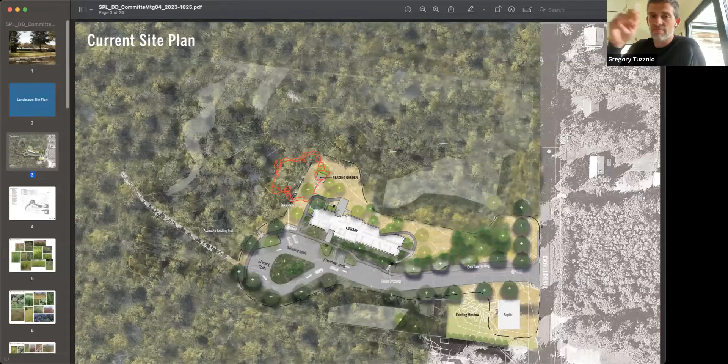It's an opportunity we could work on together, to kind of walk through the area, whatever area we define as being the general scope of the reading garden, and decide, much in the way you'd do with a volunteer group, to just walk out there and say, hey, what is speaking to us? What's looking cool? And then figure out how to literally connect the dots.

These various nodes I'm talking about could be a series of logs to sit on. It could be a flat clearing area where you have a couple Adirondack chairs, or a bench that's purchased. It could be something more communal, like a small council ring, or a gathering of stones that allows maybe 6 or 8 people to gather in an outdoor classroom-like arrangement. It could encompass any of those types of things, and it could grow over time.

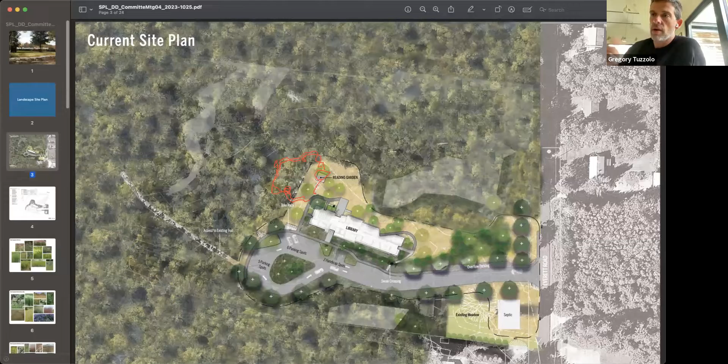It's really very flexible. But what I was imagining is that as part of the contract built by others, we would recommend that you consider the accessible portion of this reading garden feature be built by a professional contractor, if it does indeed need to be something more hard and defensibly accessible.

From a technical and legal perspective, we've found, for example, things that you can't—I don't know how aware folks are of this—but things like pavers that have joints that are too wide, or changes in elevation greater than 1/2 inch, are all restricted under accessibility code.

So the execution of an accessible path in a public building like this is something I typically would recommend to a client to have designed and built by professional contractors under the scope of a contract like what we're preparing.

And we can work to pare it down, minimize it, to make it right-sized as it needs to be. I think what you're seeing is probably bigger than it might need to be, but there's a bit of subjectivity there. So that's the concern for raising it now, and trying to advise you to consider how we might develop just that limited portion as part of this contract versus saddling you with that responsibility down the road.

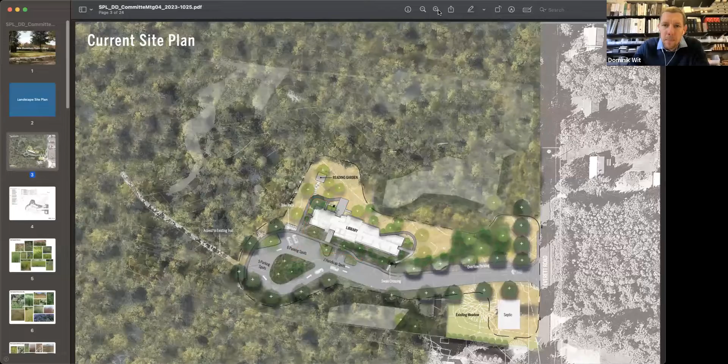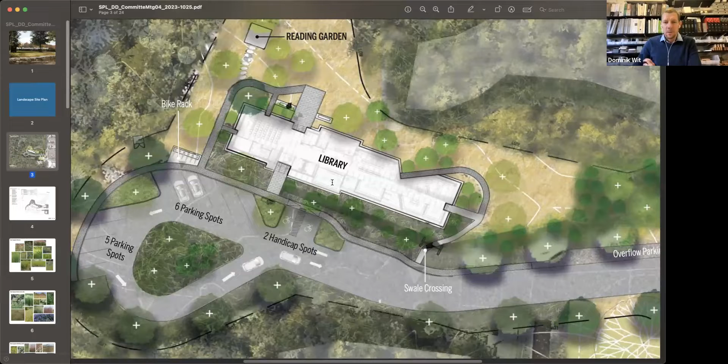Thanks. I believe that 20-foot line Greg was referring to was the volume, the bar volume of the building. So it's kind of that southern line. If you can see my cursor, I believe you can - yes, so it's this line and this line. So I thought you meant from this line, the handicap spot, to the building itself. What was that measurement? So it's only pinched at the teen room. The teen room is a pop out to the larger rectangular volume, and then it actually comes back in. The reason you're seeing this larger is you're actually seeing the roof overhang. So I believe at the teen room it would be slightly less, by 3 or 4 feet, so you'd be at 16 or 17 feet then to the curb. I see, okay, thank you.

Any other questions?

No questions, but thank you so much. May I ask Greg one more quick question?

As I look at this plan, it's hard to read, but are you proposing that the field grow in? It looks like it's shown as a wooded area now, or is that just an artifact of what you put down there? I think that is an artifact, but I guess what I would say regarding that question, I think we should address it quickly.

There is a tree line that exists currently, and Penny, as we discussed in the field, the zone, sort of an open zone, as part of our NOI process, we confront in some way the issue of maintaining that clear area almost exactly the way it is today. I think what we can revise is this rendering to make it look a little more matching with that, so it's not the intent that we're allowing that to grow in.

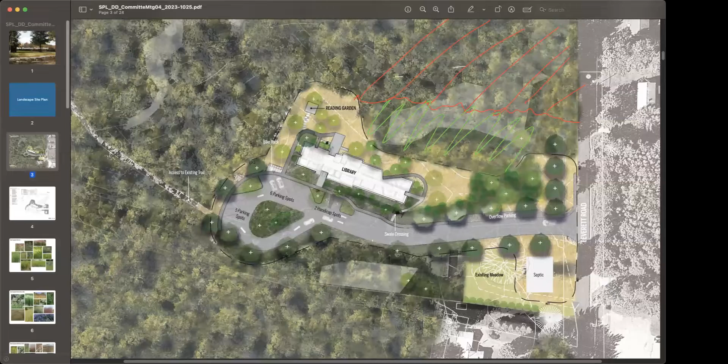Okay, thank you. I would say that the Conservation Commission likes that field, and although the issue of mowing has been troublesome over the last year, I think a plan can be worked out to mow it once a year, and I think they would like that. Any other questions for Greg?

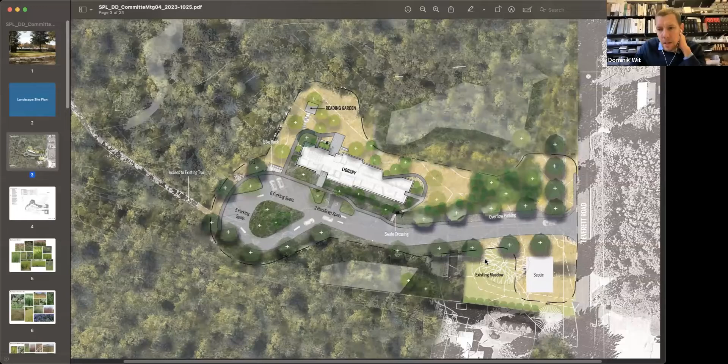I know you're on a tight schedule, so thank you. We have some other slides, Elaine, just to describe plantings. I can go to the next slide, Greg.

Yeah, there's a lot of detail here that folks can review at their convenience. But basically, we're working with Fuss and O'Neill, who understand pretty intimately the types of plants, sizes, species, et cetera, that the commission is typically looking for, and we're in alignment with that. The other piece we have yet to fully comprehend, as we're waiting on some field work, is a tree replacement program that might be imposed on us to account for the trees being taken for the project.

You're seeing a number of trees being proposed going in here, which is all good. But what I mean to say is we don't yet understand how that balances out against a required replacement program. I feel pretty confident about what we've got, but we may need to adjust this to satisfy that requirement, or define what that deficiency is and then ask for relief in the permitting process. In other words, if we look at what that delta is and say we can't afford it, or don't want to plant that much, then we simply ask for relief. But it needs to be accounted for prior to really understanding how those two things balance out.

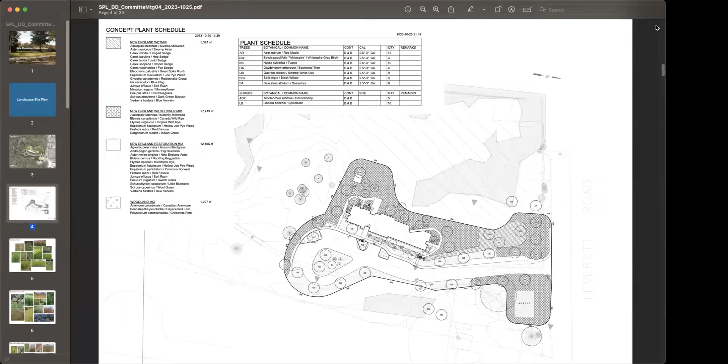Right. Yeah, it's a good point.

I think in terms of developing a sort of menu or roster of cards that we could play, that will be both meaningful to the commission and also that we can stomach from a budget perspective.

I think some of the other things discussed were attempting to get some kind of credit for work already taken place. There's a relationship to the current remediation work under the current NOI for the site cleanup. There's other activities regarding waste removal throughout the site that either have taken place or could continue further. And as Penny mentioned, there's no shortage of invasives to organize volunteer invasive removal activities that could be accounted for in some way.

And then I guess finally, perhaps supplementing this planting plan outside the limit of work to other areas of the site that might benefit from native replanting. That'd probably be the last one on my list due to cost implications. But if we just had a few things at the ready that the team understands as acceptable, palatable measures before we go into the hearings and start trading horses about that stuff.

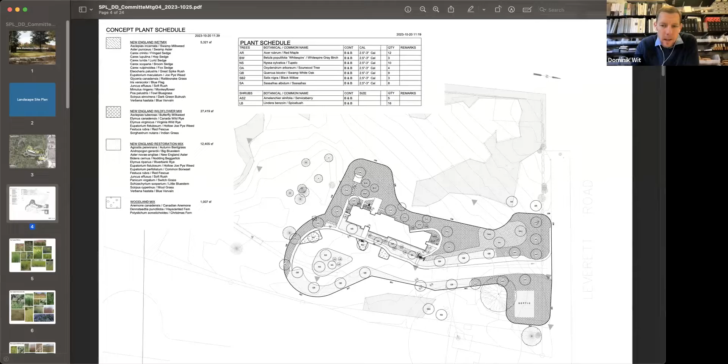The previous slide showed three seed mixes, so we don't have species identified per picture on this slide, but everything here is specified on the previous slide under New England wetland mix. This is an attempt to give you an overview of the palette of plants in this mix. Same with the next slide, a restoration mix, more used for graded or disturbed sites—various grasses, asters, Joe Pye weed, things of that nature. The intent is to replicate things you're quite familiar seeing on the side of the road and in various native parts of town.

Again, the wildflower mix, a third mix, probably a little higher cost, so we've reserved this for certain areas, and the restoration mix is more broadly implemented throughout the site. So really none of these, in my view, should be a surprise.

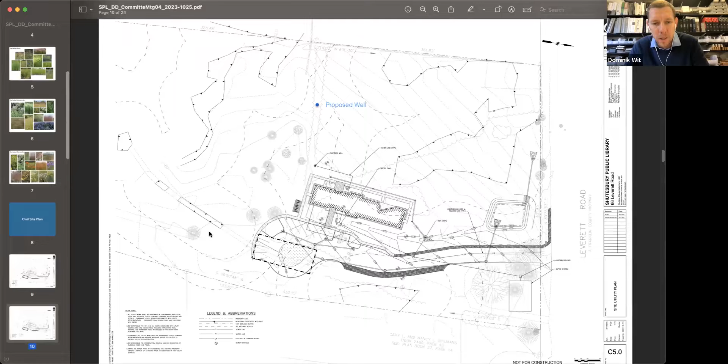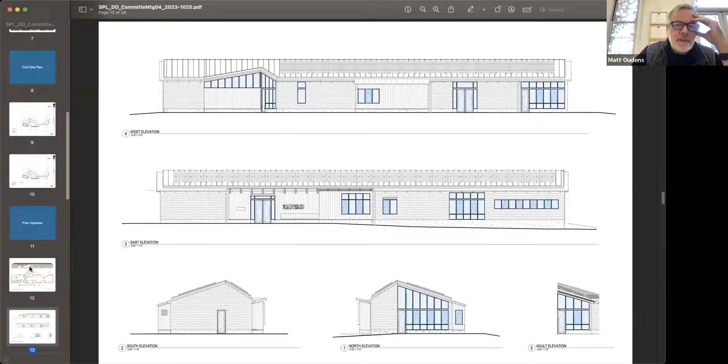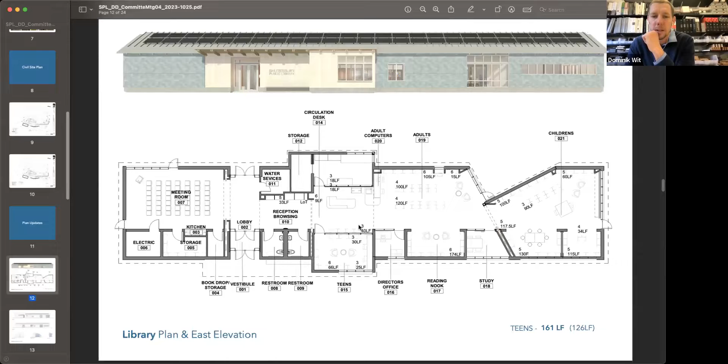Dominik, does the shelving outside of the teen room now go to the adult collection? Is that number you just had up there inclusive of that shelving or not? It is inclusive of it, and so we can now give it back to adult collections, Marianne. Sorry, I don't have that number here, but I think we were very close - we were just shy, and now that gets us over the threshold. Let me make that revision in how that's delineated. So this outdoor shelving that Matt's talking about will be assigned to the adults collection.

I wanted to get some exterior elevations to you as well, just to confirm where we are calling out operable windows. In all locations, we're calling out for there to be some operable awning windows.

Starting at the west top of the page, we have an operable window here for the staff workroom. This is the north facing window that I'm highlighting with my cursor at the bottom elevation. So you will have two operables for the staff workroom.

The meeting room will have a couple of operables as well. The east elevation, which is at entry, we have two operables for the teens, one for the director, two for the study, and then some for children's as well. That's a clerestory glaze condition here.

And then the children's north facing glass wall, we have three operables, and then we have two for the adults area as well.

Also to note, and we're still working on this, we need air intake and exhaust for the mechanical systems that are being housed in the plenum space for the building. So we're looking at incorporating how those grills are defined in the elevation.

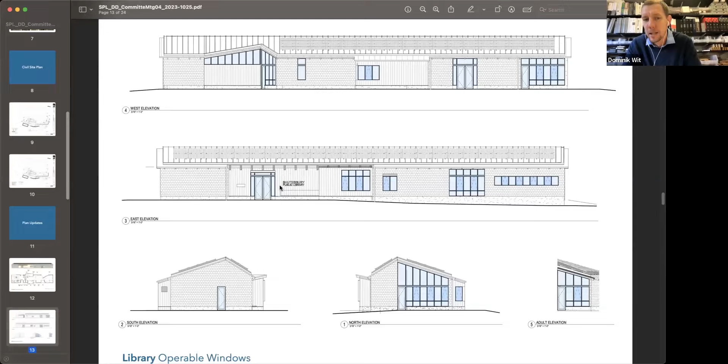Another element here that you are just picking up on is we're looking at a placeholder for a bench currently at the entry porch area. We have another view that actually you can kind of pick it up here in the elevation. So it would be an integrated wood bench, or this is what we're holding at the moment.

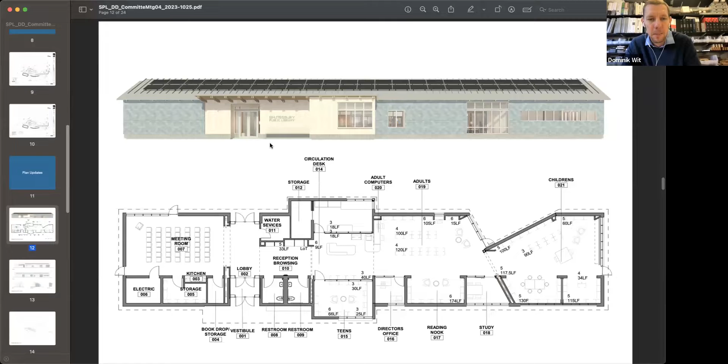So we'd like to get your input on that. This could be done in different ways. It could be more of a landscape element bench, but we feel like an integrated bench into the wood exterior might be a nice, clean way to handle that. I have another image of this that you can reference as well.

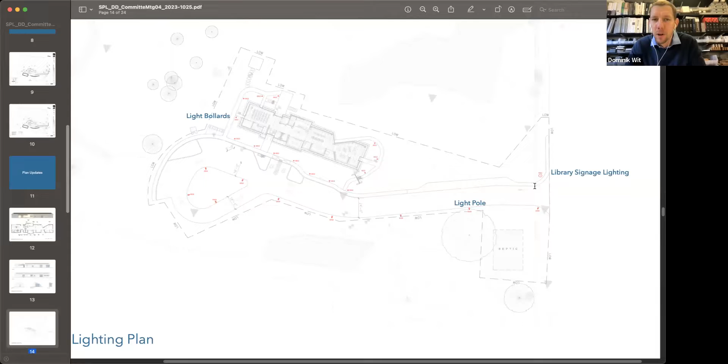Yes, hi, Dominik, could we move back to the prior screen with the east and south elevation? Yeah, see, you had a side, another, your show, yeah. So my question is, you know, I was not a fan of the prior roof design over the front entrance.

And I would like to know, I see two representations here on the north and the south of, I think, the same roof. On the south, it's sort of shown as going straight across. And on the north, it's shown with the reverse pitch. So I still have all the same questions about that roof, how it's going to be finished. Is it going to be reverse pitch? Is it going to be a flat pitch? All of that stuff. Whether or not you want to address that now or answer later.

For you today, Dale. Pardon me? We have some slides to address it in a couple minutes. Okay, great. Thank you. Yep, no problem. Marianne?

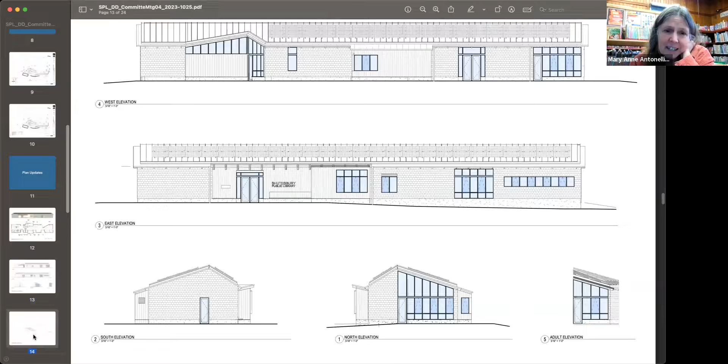Okay, so now can we go back to the lighting?

Dominic, you said that the light bollards around the ADA accessible pathways around the building are required by code. Are the light pole, this light pole up at the front?

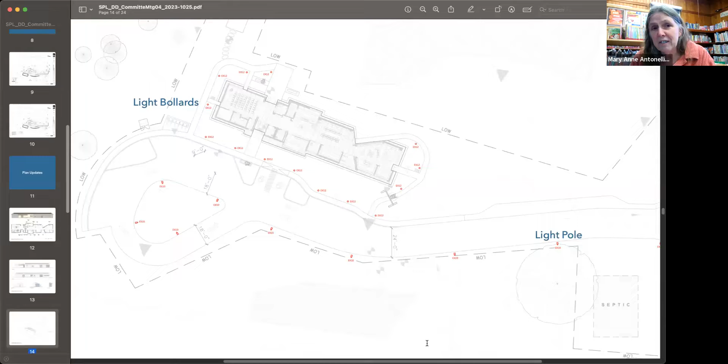So I'm thinking that this is a library in the middle of the country, and we want minimal lighting at night. So if there's a program happening at night or if it's open at night, then the building will have its lights on. And if it's closed, I don't necessarily want people to see it in the dark, same as people don't see my house when they drive by and it's dark. So how do other people feel about that?

Well, before people answer, we do have an obligation to provide the minimum amount of code lighting. We totally agree with you that we do not want this thing to be overlit. Dominic and I were just talking earlier about the pole lighting, whether we're obligated by code to put pole lights on the driveway. We're waiting on an answer for that. We know that we need the bollards at a minimum. The pole lights are typically more for wayfinding and safety, less code related from what I recall, but we are looking into that.

But we agree with you that we want this to be as minimally lit as possible. At the same time, we don't want it to feel unsafe. It's a public building, it gets dark early in the winters, people walk to their cars. I know it's unlikely that anything is going to happen in Shutesbury, but I think having some minimal amount of light around the building is not an unreasonable goal. I agree, we want to balance what we've got with the fact that it's in the middle of the country. We don't want it to feel like a spaceship landed.

Is it ridiculous to think of these as being motion sensitive, so they wouldn't be on all the time? Or a time clock, if that's feasible. I think in terms of security and the ability for the police department to come here after hours, early morning or whatnot, we need some more definitive answers on that. But I think there are opportunities to control this if it's required by code - can it be controlled more to the opening hours, or staff being there, things like that. So I'll get an answer to you, Elaine, on that.

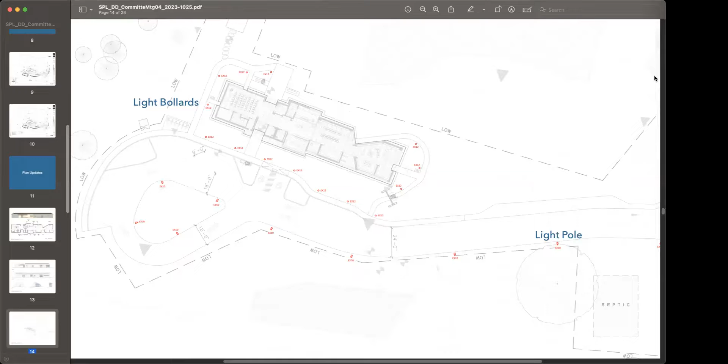Penny: silly question, what is a light bollard? A light bollard is basically a light source that's mounted on a pole, but a short version, 3 feet tall, something like that. Bollard really describes the post condition - you have security bollards located around certain equipment to protect the building from a car accidentally reversing into it. A light bollard is the same kind of thing but with a light in it.

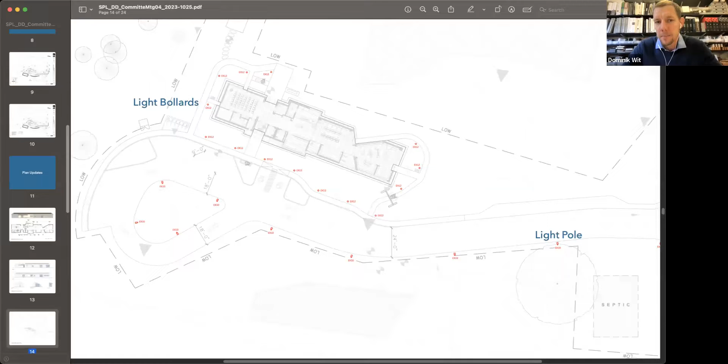I was talking to Stimson about what these could be. We're looking at a very minimal design, as small as we can handle, something with minimal diameter. We've also used flush lights before, but I worry that for code they wouldn't qualify because there's the potential they can get covered with snow. It's the kind of light that almost looks like a floor outlet - it's got a slightly raised profile but you can walk across it, with a very narrow opening that emits light that literally just grazes across the surface. We've used them before on the exterior, but in covered locations where it was less of an issue that they might get covered over.

But to Dominic's point, we do want to pick something that is visually minimal, so they'll be low height, relatively low output. All of the fixtures we're looking at, whether bollards or pole lights for parking, are going to be full cutoff fixtures, so the light is only directed down to the ground. You're not throwing light everywhere - we don't want any light going up.

And that helps a lot in terms of the kind of relative light in an otherwise very dark setting. So we'll have, in all these places, full cutoff fixtures.

So each one of these red dots that I'm seeing, those would either be bollards or poles. That's correct. And the ones that are on the parking, along the side of the building, yes. All of these would be bollards. Yep, all of those are bollards.

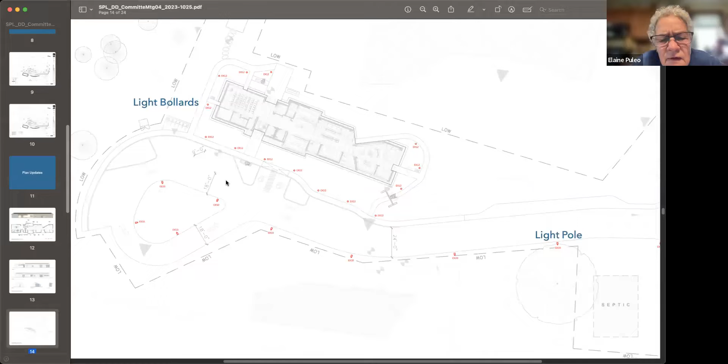Okay, so it's a little difficult to see. These I've called out as EX12s. I see. And then the EX10s are these. And then there's the one which is undefined, EX11.

It's really just to get electrical out here so that we could at least, if there's an appetite for that, illuminate an entry sign in some way. And that could be as simple as halo lit letters. If you guys know what halo lit is, it's when you have a three-dimensional standoff letter, and behind that 3D letter, there's a light source. So the light kind of bounces off the background that the letter is mounted to, and it silhouettes the letters. It's a very indirect way of lighting something.

It's that you're not shining light at a sign, you're not putting a floodlight onto a sign. It's a much more understated way of lighting something.

So here's another probably silly question, but that one with the library signage, it seems like you're going to be pulling electricity all the way out to that side, whereas could that be a solar light? It could be, and then it wouldn't have to have any electrical wiring to it. That's a good point.

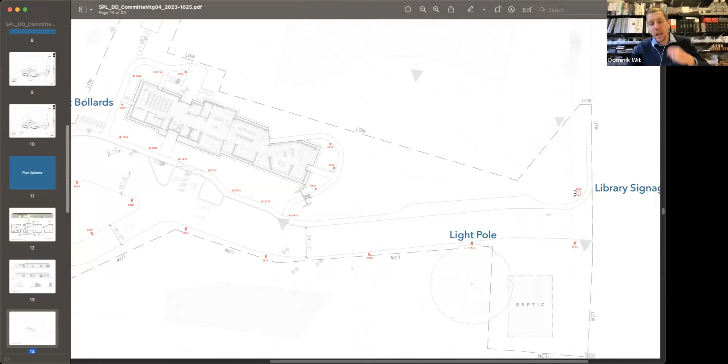We will be running power all the way to this pole, if required. So we would have to trench a little further to get power out to that light source. But yes, it could be solar - in the case of winter and snow, or maybe leaf debris, you may find that it does not perform as well. That's not necessarily a big issue.

Right, I have them around my house, and it doesn't really matter. They even actually shine through the snow. Right.

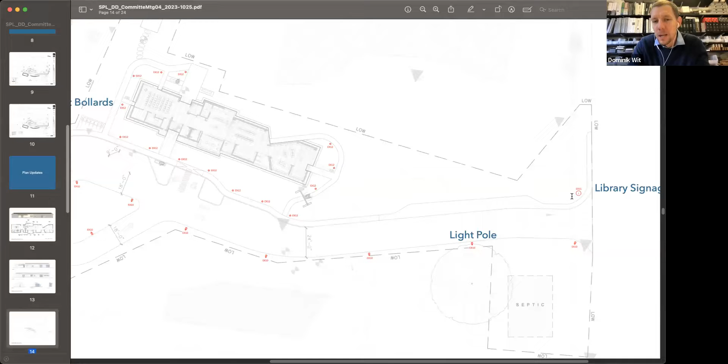So this is really kind of a placeholder to something that we think definitely enhances the entry experience, but again it's your call on that for sure. We don't really need lighting there - it's not a code requirement for the sign.

You may get borrowed light from this. This is really an effort to capture scope for DD pricing. We may find that before we issue the set, we're able to tweak this layout a little bit to maybe reduce a couple of fixtures.

We'll get an answer about the requirements as it relates to code for the driveway and parking. We know that we need them around the building - we have building mounted lights at every exit door. That's a requirement of code. In addition to that, you're supposed to light the accessible pathway around the building.

The spacing here is based on some photometrics from another project. We've got to do a little more work to confirm that this spacing is the right spacing. We may find that we can space them a little further and maybe reduce. How wide is that donut?

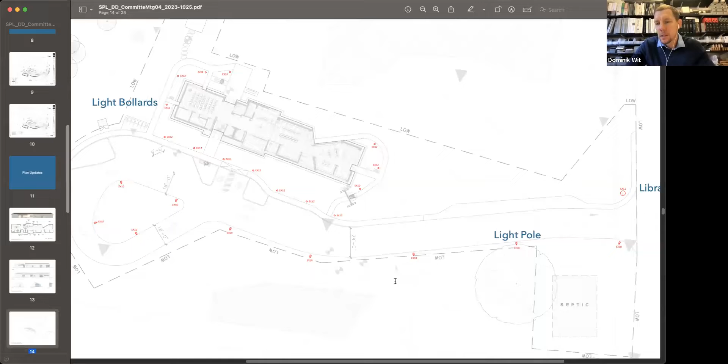Make sure that we're capturing enough scope and pricing. So here I've got about a 10-foot radius around each bollard, and then I think it's 75 feet around these street lights. So they kind of overlap the radius of illuminance.

I was wondering about the donut though, in the middle of the donut. How wide is that? Well, that looks to me like it depends - it's like 40 plus feet across here, 50 maybe.

And that, by the way, that landscaped area there is also doing some work for us in terms of stormwater. That would be planted - that's kind of a bioretention area.

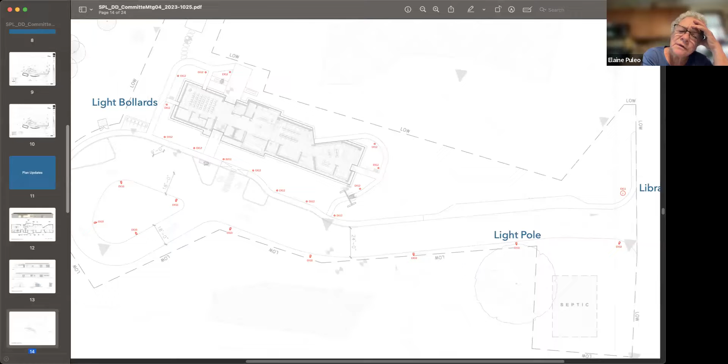Yeah, I'd have to go and look at the school at night and see what their lighting situation is, just to see how much light we really want to have, or that we need to have.

I think we are definitely on border line with code minimum, and we are not looking to add any more than we need, so we will definitely go that avenue.

Yeah, there's, from what I remember, pole lighting at the school. Just remembering the last time we were there for the community meeting, it's pretty minimal though.

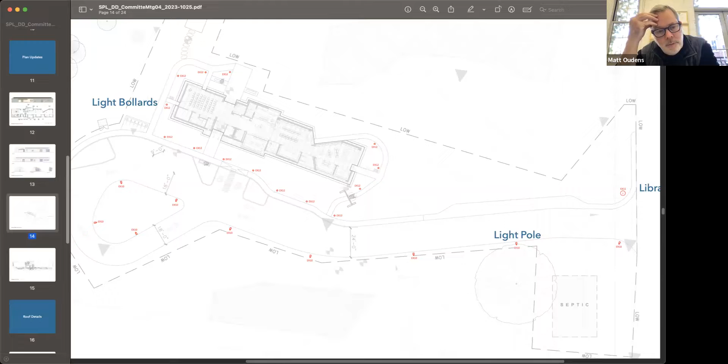Right, and I think as we've said, we don't want to overlight this, so we'll confirm those requirements and reduce this as much as we can.

So the next plan, obviously in the background since we met last, there's been a lot of coordination as our consultants have been tightening up all their drawings. I just wanted to quickly bring your attention to the mechanical and HVAC drawing.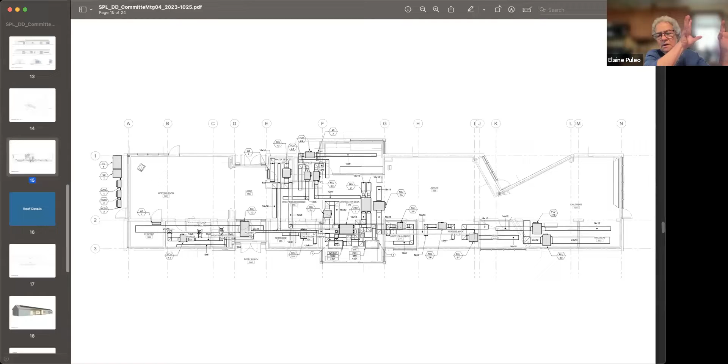So you will just be having a ladder that we would open the ceiling panel and go in there? That's right, and you would just stand on the ladder - you wouldn't even need to be fully up in the plenum space. They're going to be kind of low, so the person performing the maintenance, when you see them do that, you'd probably see the lower portion of their body still on the ladder, visible in the room, with their head up in the plenum space, taking filters out and replacing that way.

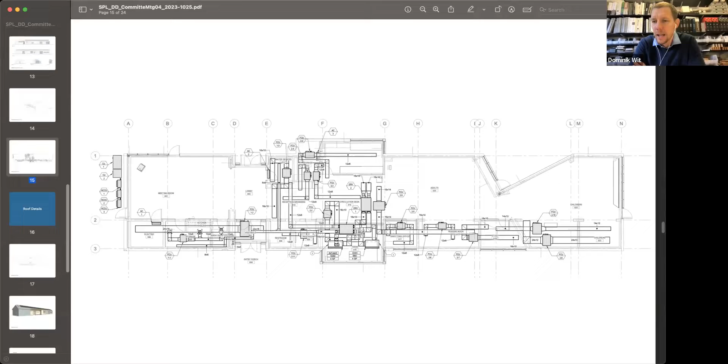What happens in 20 years when the equipment needs to be replaced? How do you access it then? Then those ACT ceilings, which are installed on a grid system, can be removed incrementally, I believe, Matt. So you can take portions of that out - it's definitely installed in a modular way. Thanks.

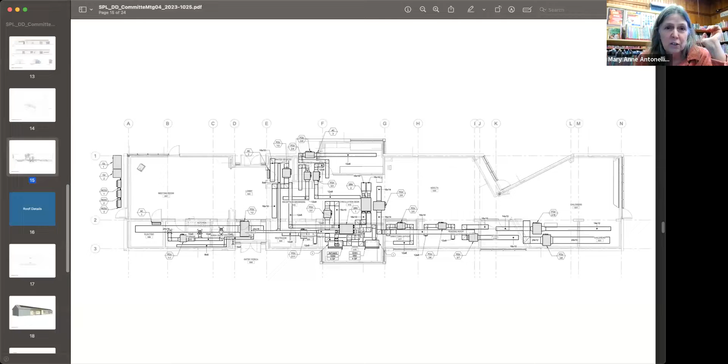Mary Anne, are you going to be up there on that ladder? No, I'm not, but we have a heater in the ceiling and Chris changes the filters. Chris is my husband, for those who don't know. We had to have the heater replaced, and the heater replacement guys came and took out the old one and put in a new one. So I've seen this all live and in person, and it's not nearly as daunting as it sounds. Okay, thank you for that. As long as we keep you and your husband.

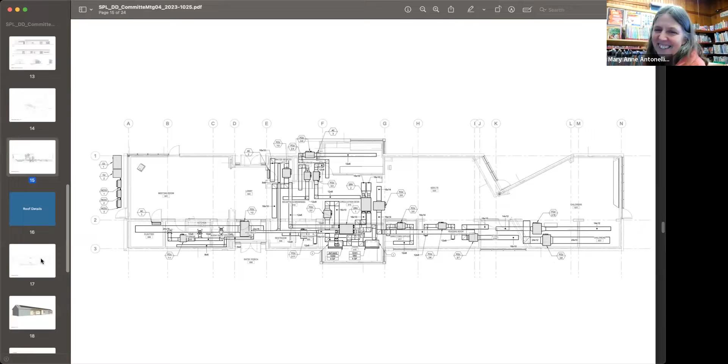So moving on to roof details here, I have a roof plan which shows you the location of the photovoltaic arrays, and also the portion of roof here at entry. What I wanted to show you is that to work with the rainfall and snow, and to be able to have runoff to either side of the edges, we're going to incorporate a cricket here, which is a kind of lifted condition that allows the water and snow to drain off to either side.

It's basically a drainage path that you create on this portion of the roof. I've indicated 2 downspouts on either side that would collect rainfall. General strategy for most of the roof is to allow water to sheet off the roof and be caught in kind of a catchment trough that we're going to have around the building. It'll be like a gravel perimeter.

We will introduce a gutter at this location, because we have 2 exit doors, one for the meeting room and one for the lobby. And then we have an exit door at the adults room, whereby we're going to incorporate a metal rain diverter. It's a small metal lip that takes on this angle and captures the rainwater caught in this zone and directs it left and right. Again, we'll have a gravel drip strip around the perimeter that will catch that. So there's a few entry and exit locations in the building that we're going to account for the rainwater with this gutter, and then with these 2 downspouts on either side of this roof.

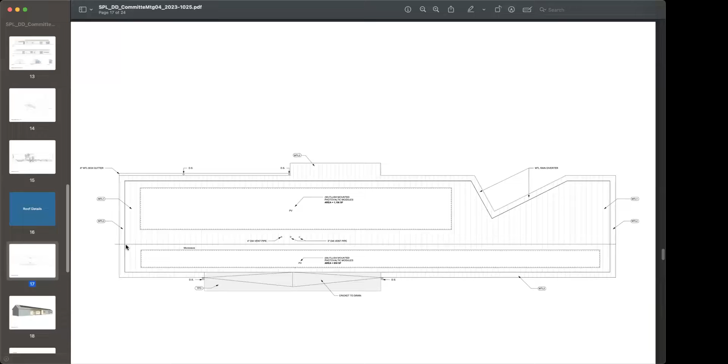Yeah, hi, thanks Dominik. Two questions about the rain diverter. One is, at the last meeting we talked at some length about whether that perimeter portion of the roof was going to be standing seam or lap seam. Has that been determined yet? If it is standing seam, is it, because it looks the same as the other roof to me now, how does that work with a rain diverter?

It does, and so yeah, we do have 2 systems. The standing seam is the main upper roof, and we have a small eave condition here which is going to be a flat seam roof. Okay, so same product without the expression of a seam, but it is panelized. And so when you install them, those panels interlock, and you will get a reading of the seams in line with the standing seam above.

Okay, so the rain diverter, how tall is it? I'm asking this because we've had this discussion in past meetings, that the severity of storms and the force of the water coming down on the roof is getting more intense, and I expect will continue to get more intense. If it's 3/4 of an inch, that's not going to stop it. That's right, I think it's 4 to 6 inches, I have to confirm that for you. I know we were looking at products, I don't have that in my head right now, but it needs to be substantial. Okay, good, great, thank you.

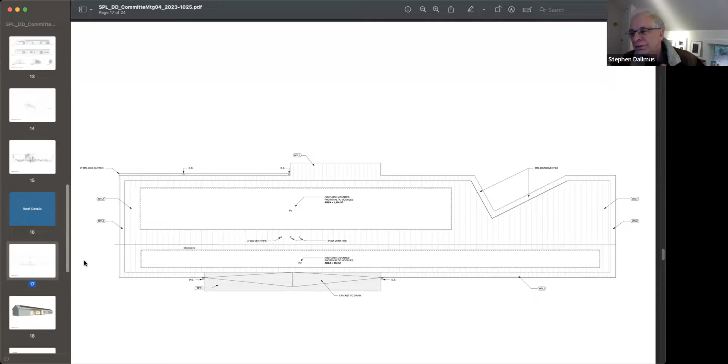Yeah, specifically it's a good question. I have a detail actually that I'll show you guys. Okay, and I came prepared today. And then maybe your details show me. So the TPO figure is, we'll say, a 25-year roof, right? 30, yep.

Okay, so at some point the TPO is going to need to be replaced. So I guess the question is, does the detail allow for that?

It does. We actually engaged a metal roof manufacturer, and they have a design build outfit within their company. We've been in close communication with them about how to correctly detail this, and they assured us that with the 30-year warranty for both the metal and TPO roof, any repair would be covered under that warranty, including the removal of some of the metal panels required to make that repair. So we got assurances from them that that is possible.

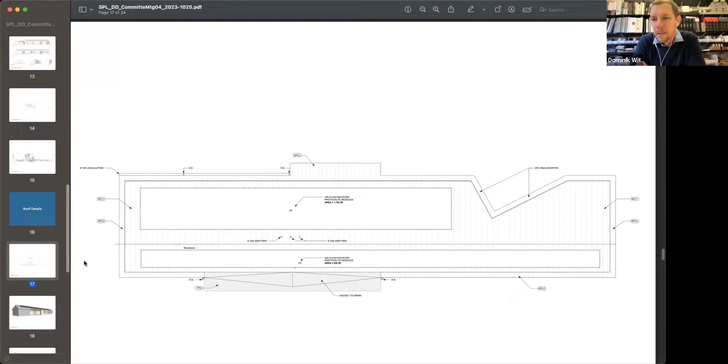Yeah, it's possible to replace the TPO. That's right, minimal disturbance to the metal. That's correct. Okay, and you said you have a detail. Yes, getting to that.

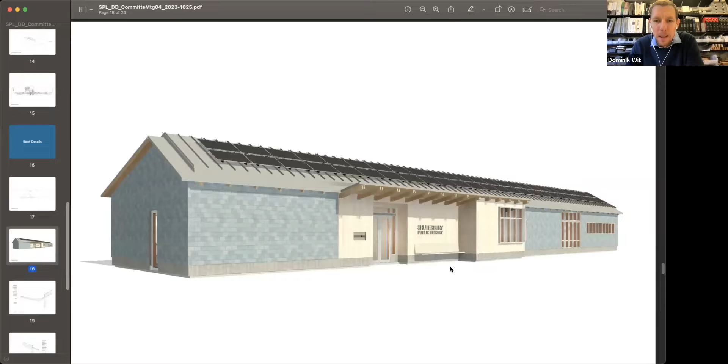Great, best for last. So again, this view here was to show that effectively the cricketing happening behind this upturned roof is a measure to raise the condition there and allow water to drain left and right, as indicated in the plan. I also wanted to highlight, Marianne, that this is our considered bench condition that you get a different view of. But going to the details.

So this is a section cut through this upturned roof, around where we currently have the sign shown. What you're looking at here is the structure, the glulam structure coming out through the exterior envelope, and then the upturn being supported by this additional glulam joist coming out here.

Up to the right here is the main roof, the standing seam portion of the roof, where we have currently drawn 7 inches of insulation. Then when you get to this point, you are outboard of the exterior envelope, and then you get to this upturned roof condition.

So here you can see a faint line representing the top portion of the cricketing. This section is cutting through roughly halfway where the cricketing is happening, and you can see there's an increase in thickness. Effectively, as you get to the ridge of this cricket, you are infilling this whole condition to allow water to run left and right in plan.

As far as finished materials, we have standing seam roof here that then starts to incorporate metal flashing, coming down to this portion here, very much at the ridge of the cricket. From there you have the transition of TPO that finishes this portion of the roof, the upturned roof. Again, we will incorporate metal flashing at this end condition with correct connections.

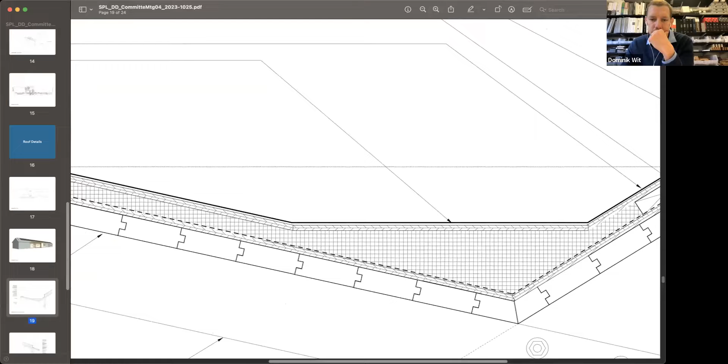Okay, well, I really appreciate the detail here. So as I look at the TPO coming up behind the metal, currently, going down to the structure, you've got your ice and water shield. That's the dotted line, correct? Yep, AVB, yep. Okay, so behind the TPO as it turns up, there's no ice and water shield. Is that correct? No, that's correct.

So this is really your moisture, this is your fail safe, this dotted line down here, not up here. We do have a felt paper, I have to refer to the note again, that is incorporated as part of the metal roofing assembly. So that turns down. I have shared this kind of hot off the presses.

And again, you know, the benefit of us working with this roofing manufacturer, they're calling out that the TPO should actually come up and lap further up, and that's going to kind of close this condition. Okay. Yeah. Well, that makes a lot of sense.

But then let's go to, say, 30 years down the road when you need to replace the TPO, but not the metal. Not going to be able to replace up under the metal. Well, you have to lift the metal roof. You will have to remove some of this standing seam roof to be able to make that replacement in 30 years.

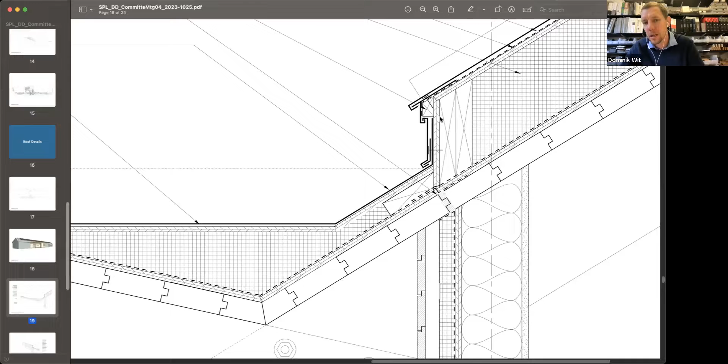And is that something that the company you're working with does regularly? Yes. This is a sound detail to them, owning a 30-year warranty for both elements and the interface. Okay. Thank you. Does the same company make both the TPO and the metal roof? That's right. Thank you. Yep.

Dale, you have a question? Yeah, I'm a little surprised that we're only seeing a 30-year guarantee on a steel roof. 30 years is still a 30-year guarantee. Correct. But I put a metal roof on a barn more than 30 years ago, and it still looks great today. So I'm anticipating a much longer life than 30 years for that metal roof, hopefully.

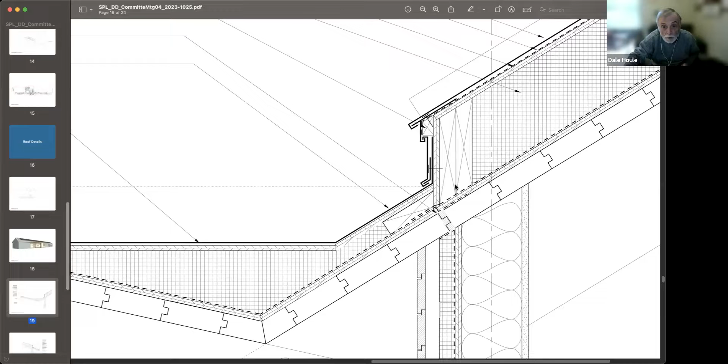But I am concerned about the TPO metal interface and that detail. I wish that there wasn't a fascia there, because I see that as a weak link in the whole thing. I wish they could just sort of come together. I do appreciate the flat trajectory, more or less, of the cricket. In other words, it's not a straight pitch back, it's not an inverted V. I think that makes a difference.

But as a committee, we have to look at how we're spending our money on this project, and I'm not sure. It's a judgment call on my part. I just don't know how enthusiastic I am about defending money being spent on this. I still am not a fan of this thing. I would rather see the roof go straight out, personally.

But Dale, that wouldn't eliminate the transition, right? We would still have a connection between the flat roof and the sloping roof. Well, I haven't been to Norwell, but I like the idea of sort of the flat top coming straight out perpendicular from the building lower down, separating the two.

Yeah, the challenge of that is that you then have a transition from roof to wall, wall to roof again. You've got that section of wall between the two roofs that has a transition detail at the top and at the bottom of that. And it's also a place where snow can collect.

In Norwell, one of the differences between Norwell and here is that we've got a 3.5, I think it's a 4 foot overhang of the roof from the wall, which makes a huge difference. We can't do that here because of the limitations in square footage with the roof area and trying to manage the sprinkler requirement. So we can't have a deep overhang like we did on Norwell or on Eastham.

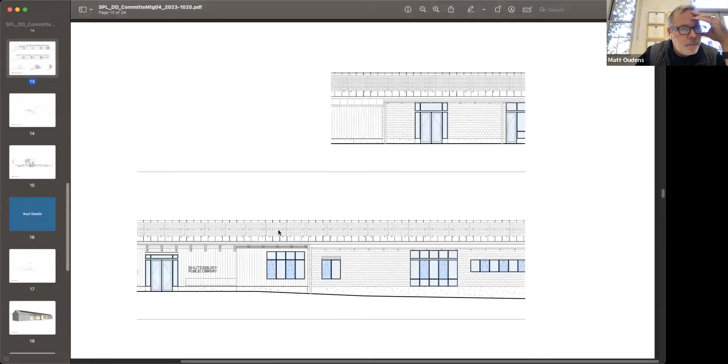I don't think you would get ponding because it's sloping pretty aggressively. Dominik, if you actually go to the elevation, maybe that's the best place to see it. So yeah, so it would be.

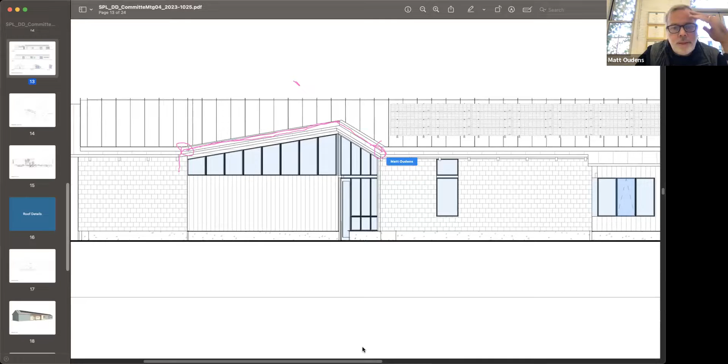It would be here and here, right? So you've got pretty positive pitch in both directions, and then here and here it's basically open-ended. So anything that is coming in is coming out and then draining off here. And whether in the end we feel like we need downspouts or not is something we'll need to think a little more about, but that's the idea.

So I don't foresee any real issues there with ice damming, but it's something we'll talk through with the roofing manufacturer and get their recommendations. I think at a minimum, Matt, we would favor treating it like a valley - full ice and water shield, 3 feet on either side.

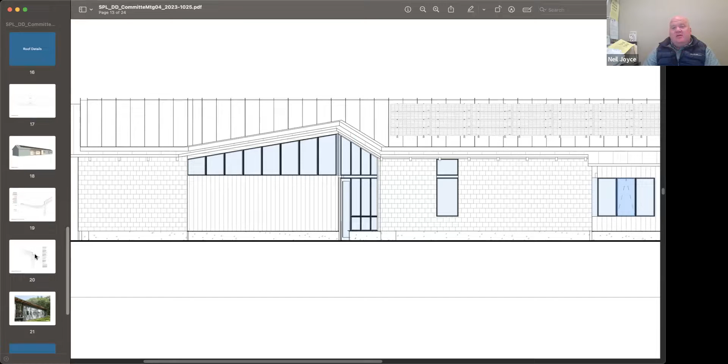As opposed to paper. Yes, I agree with that. And I think in any transition we're going to need ice and water shield behind that too.

Yeah, I mean, I think you could argue the roof is so small that if you do 3 feet either side, ice and water all the way around, you're going to have very little paper on the roof. You might want to consider just doing the whole thing ice and water. Yeah, that's a good point. Yeah, maybe.

So they call out rosin paper, but as you say, ice and water might be the way to go. I would just ask them about it. I'm just concerned about ice dams - metal roofs typically don't ice dam, but intercepting the water flow and diverting it just has me concerned. That's all.

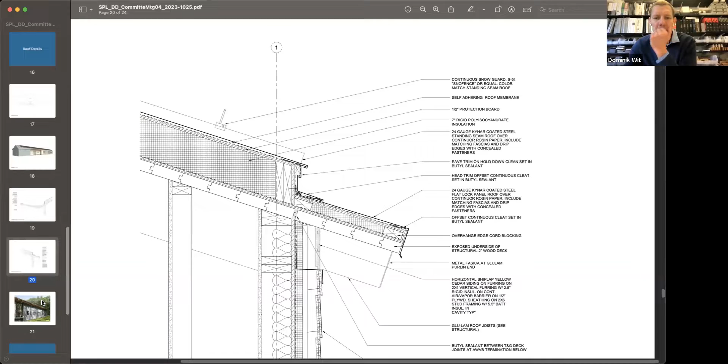Okay. So that's really what I just wanted to show you - our discussions with Garland about the transition between standing seam and flat seam here.

It's very common practice for them, as is the other detail. We did have here - we're showing a metal fascia that Matt highlighted on the edge condition of these purlins. Similar to the image shown here, we have structural rafters supporting the roof, and that end condition you just want to protect from exposure, basically.

So this is basically what we'd be proposing. It would match the same color as we're using for the metal trim, and it better protects the structure there. Stephen, in your details...

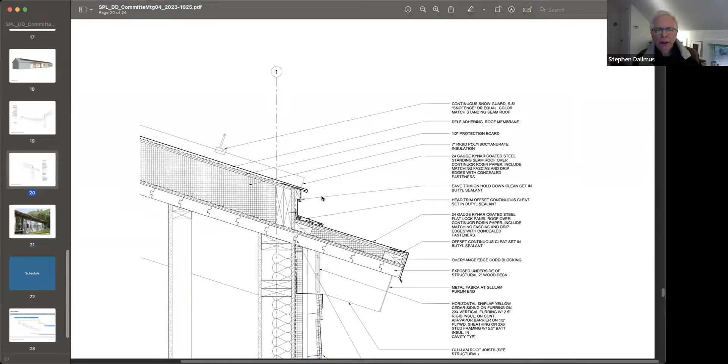This one, the wall - is that 2x6? It's a 2x6 wall. And that one you show, I guess, 3.5 inches of fiberglass on the inside. But I think the previous detail it looked like 5.5. Yeah, we're actually carrying 5.5 - there was a discrepancy between the two. We're going to make sure we own 5.5 on the interior, and we will also include 2.5 rigid on the exterior.

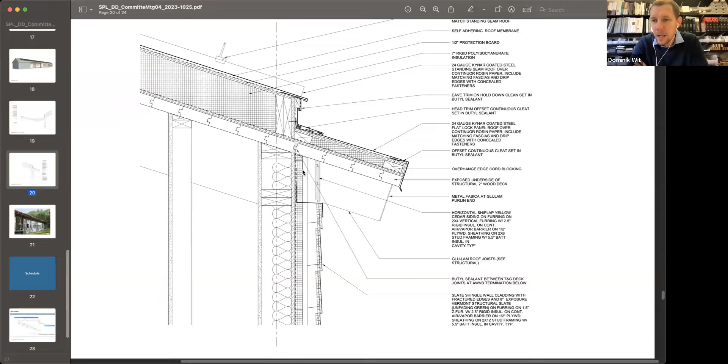So the stretch code has recently been revised in July, and we've had to revise our envelope detailing to meet code requirements now. As you see here, you'll see 5.5 inch, and we're calling for 2.5 inch rigid insulation on these. It's currently drawn at 1.5, but we're going to increase that.

Great, yep, thank you. They've really overhauled the energy code thermal requirements for buildings. It's pretty extensive, and we're seeing this now in all of our projects, trying to figure out how to understand the new code requirements. They've switched now from an R value rating to going with U value only - it used to be that there were two different paths for calculating R value of walls, what's in the cavity versus what's continuous on the outside. Now it's just a combined U value.

So as long as we hit that U value, we still have to manage the dew point, which is where moisture happens from, where warm and cold air meet. We want to make sure that dew point happens on the exterior face of the AVB, the air vapor barrier. So we have the balance between insulation in the cavity and insulation outboard of the sheathing and the air barrier. We still have to walk that line in terms of the ratio of what's inside, what's outside.

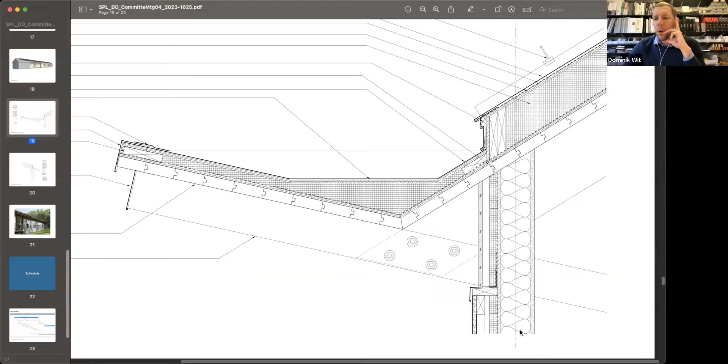What is the HERS score that you'll be looking to achieve on this building? We're working with Bala, our mechanical engineers, on energy modeling, and I don't have that off the top of my head, Matt. So we can get that. I don't either. Well, I think we need 52 now in 2023, but it's going to be 42 in 2024. Is that the idea? Yeah, I need to get back to you on that. Okay, all right.

We also don't—I mean, the HERS index is not one that we typically refer to. Usually we're talking about EUI, the energy use intensity of the building, and managing that number. But we will have our energy model done right after the DD set is complete, so we can start talking about some of those things.

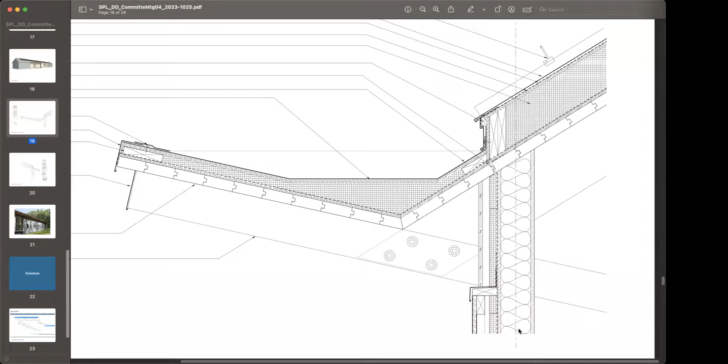What are those things? What was it you asked about, Gail? What kind of index? HERS, HERS, which is home energy. That's on the residential side. I'm not sure if it applies on the commercial side or not. Yeah, we don't—as I said, we don't typically deal with the HERS index.

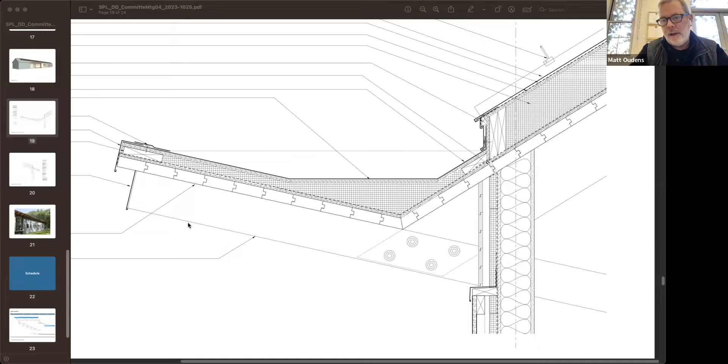But we're going to meet the energy code, the stretch code. We are doing everything we can to achieve net zero energy, as we've all talked about. We also have an eye on our EUI, which is really the measurement we use when we talk about how much energy a building is using. We want to be lower than an EUI of 30. EUI stands for energy use intensity. 30 is a good benchmark, and we want to be around there. If you look at buildings built in the 80s, the EUI is considerably higher than that for the average building. So we'll know more after we get the energy model results where we are.

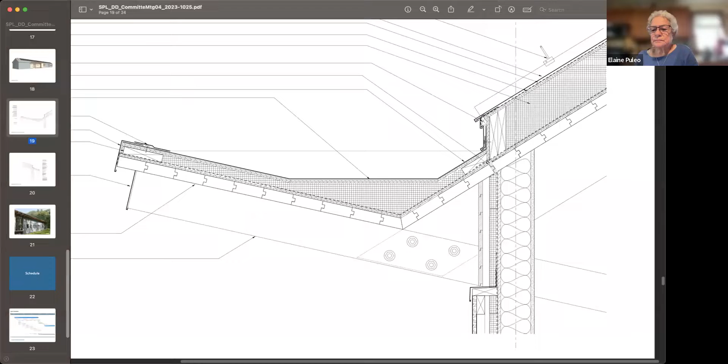Okay, that's everything I had for you today, other than schedule and the look ahead. We are aiming for DD submission this coming Monday.

Our civil engineer is currently waiting on test results, which they need to properly define grading for their documentation as part of the submission. So as it stands now, we're allowing them to submit next Friday to give them a buffer to roll that information in. There will be some coordination effort with landscape as well for that Friday submission. So currently we're just waiting on the testing results to get that in.

We're going to allow our cost estimator two weeks to estimate the project. Thereafter, we will obviously evaluate that.

Matt, I think we had discussed a page turn of the DD set with the group. I feel like it would be good to do that with the civil and landscape drawings all together, so I don't think we'll be ready for that next week, but the following week we could potentially do a page turn comprehensively, including landscape, civil, and then architectural and MEP drawings. So that would be the second week in November. But we'd like to release our cost estimator with the rest of the set as they're waiting for some supplementary drawings from civil and landscape, which will hopefully be next Friday.

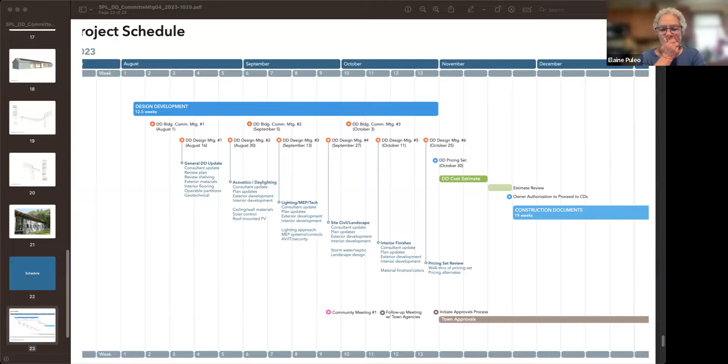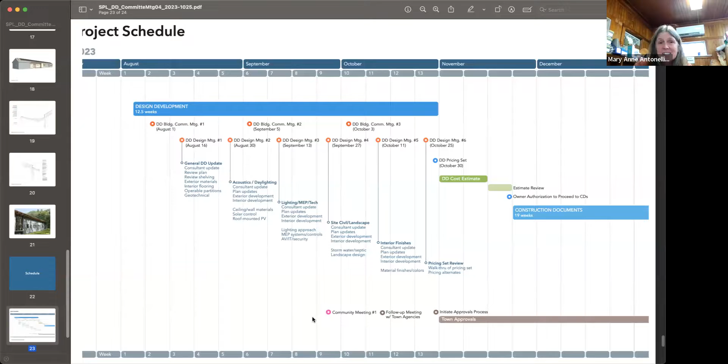Mary Anne, are you clear on where we're heading? Yes, I'm going to post a meeting for November 7th at 7 p.m., mostly for a page turn of the entire DD set. And then we'll have the pricing about two weeks after that, so we kind of hold the 21st as the 21st.

And we'll have a couple of days to review it before then, hopefully. We'd have to, yeah, because it's a lot.

Matt and Dominic are going to send Andrea the pricing set as they send it to their cost estimator. And we're going to spam Lauren with email every hour of the day between now and 5 p.m. on Friday, just so we can send you jokes and funny pictures and memes. As many cats as possible. You can print those all out and take them with you.

And then on the 21st, we'll all be pleasantly surprised by the cost estimate, and we'll vote to move forward with the next phase.

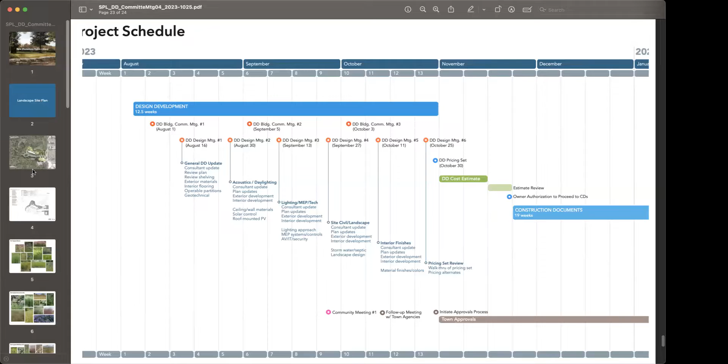Yeah, they're in the 100-foot buffer. I thought it was a 50-foot buffer. If it's a 100-foot buffer, then it's anything being cut down on the site, basically. Well, not by the septic system. Yeah, right. Just about everywhere else. Yeah, right. A lot of trees to be.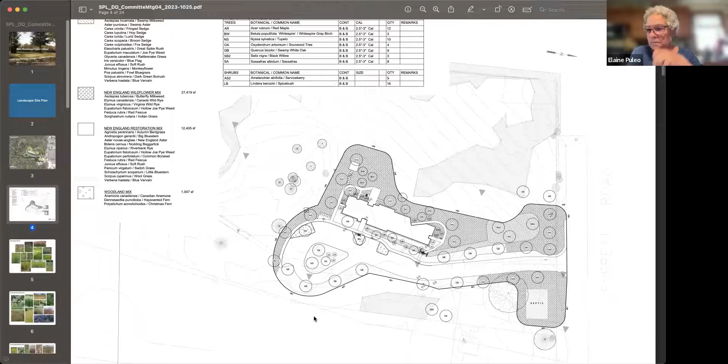If you need help with that, Penny, let me know. Okay, I would love to have some help. I think I need a caliper as well because we have to measure the diameter also. You're a... where's AI, Penny, for a job like this?

Oh, really? Indeed. Okay, well, I will continue to hold my breath until the notice of intent is done with the commission and the cost estimate is back. Yep.

Okay, I know Brad, you need to leave. I'm sorry. Can we move on to the review of the well installation engineering needs?

Mary Ann? So, a couple of weeks ago, I got a proposal directly from Fuss & O'Neill for the well engineering, which was

not, which Oudens Ello says that they expected would be the town's responsibility. But when I look at their proposal, they don't say that it's the town's responsibility. So currently there isn't a contract for well engineering or permitting.